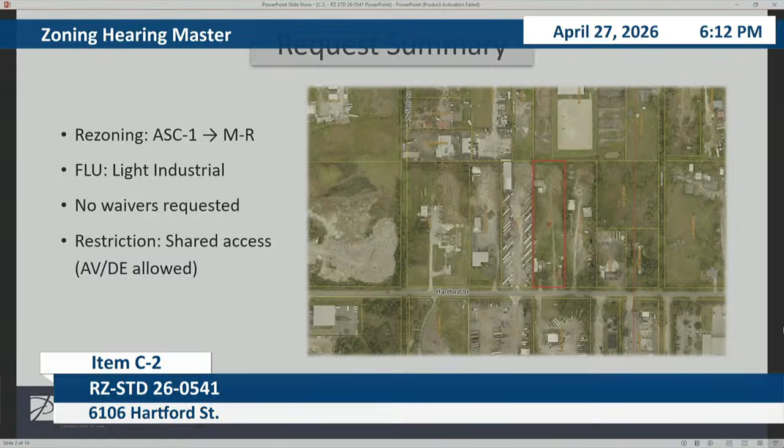All right, good evening. Good evening. Ryan Manassi with Johnson Pope, Director of Planning. Again, we're here tonight requesting to rezone the property from ASC1 to manufacturing restricted for the property located at 6106 Hartford Street. This is a pretty straightforward standard rezoning to align the zoning with the light industrial future land use. There's no waivers or variations being requested, obviously. The only condition is a transportation-driven shared access restriction with flexibility through an AV or DE if approved at time of permitting.

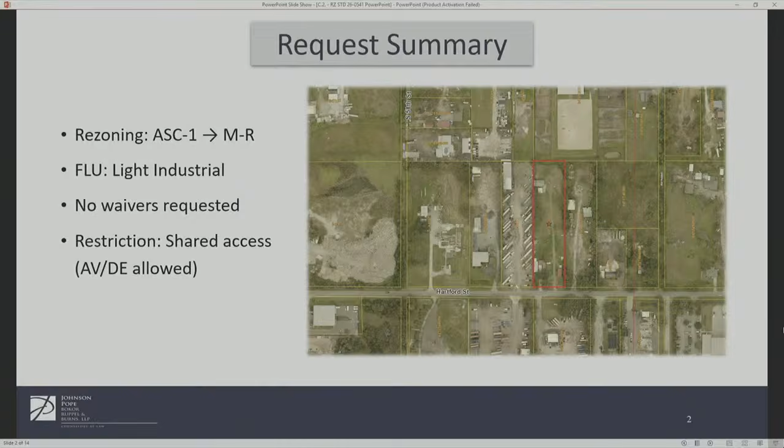The subject property is approximately 2.3 acres, and it's within the urban service area where industrial development is anticipated. It has frontage along Hartford Street, which is a county collector roadway. Currently, the site is limited to very low density residential. Under the proposed MR zoning, it can achieve an industrial type use development, which is consistent with the LI designation.

The subject property carries a light industrial future land use category, which is specifically intended to accommodate manufacturing, warehousing, storage, and other employment-generating uses. There are no incidental uses; they are the core and intent of the LI category. Specifically, under FLU Objective 2.2 and Policy 2.2.1, the future land use map establishes both the range of permitted uses and intensity framework for each category. The requested MR zoning falls squarely within that framework, allowing the site to develop consistent with the character and intent of the LI designation.

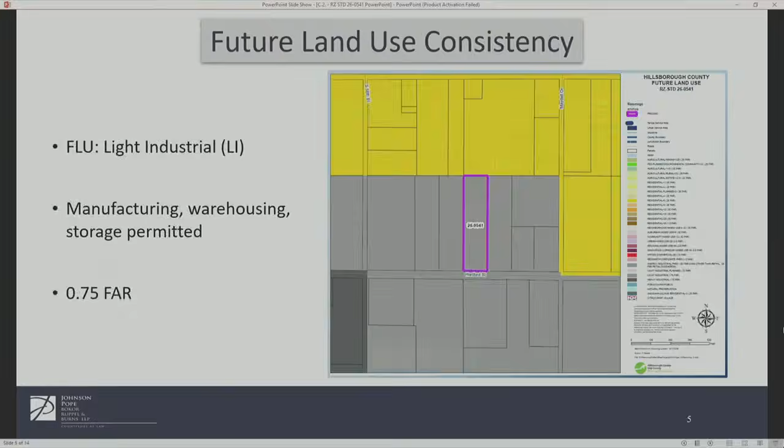This ensures that the development remains within the adopted comprehensive plan limits. And I know your staff is going to present, but Planning Commission found the request consistent, as well as Development Services found it approvable, subject to the transportation-related access condition or restriction.

Regarding the surrounding area, when evaluating compatibility, it's critical to look at the actual development pattern on the ground, not just the zoning labels. In this case, the surrounding area is predominantly characterized by industrial, commercial, and open storage uses, including truck parking and similar operations immediately adjacent to the site.

This establishes a clear and prevailing industrial corridor along Hartford Street. While there is residential to the north, the condition is typical of transitional edges in the county, and the Land Development Code specifically addresses those interfaces through required buffering, screening, and site design controls.

As such, the rezoning does not introduce a new use pattern. It reinforces and continues the established pattern already present in the area.

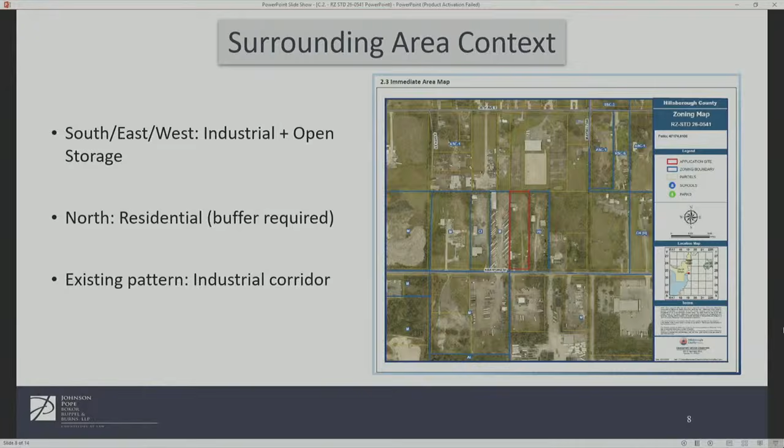Now, regarding compatibility, it is one of the central considerations in any rezoning, and the comprehensive plan provides very clear direction on how it's to be evaluated.

Under FLU Objective 3.1 and Policy 3.1.3, compatibility is not defined as same as; it's defined as the ability of different uses to coexist in a manner that maintains the character of the surrounding area.

Here, the character of the surrounding area is already industrial in nature, with manufacturing, open storage, and commercial uses located to the south, east, and west.

The proposed rezoning simply extends the established pattern onto a property that is currently underutilized relative to its future land use designation. Policy 3.1.2 further emphasizes the importance of transitions between uses, which are achieved through professional site planning, buffering, and screening, not through preventing appropriate uses altogether.

That is exactly what will occur here.

The Land Development Code will require buffering and screening along the northern property line to ensure a proper transition to the existing horse arena. Finally, FLU Objective 4.4 and Policy 4.4.1 reinforce that new development should be integrated with surrounding uses through complementary land uses and mitigation of impacts.

Given that the proposed uses are already present in the immediate vicinity and that all the applicable buffering and site design standards will be met, this request meets and exceeds the comprehensive plan's compatibility requirements.

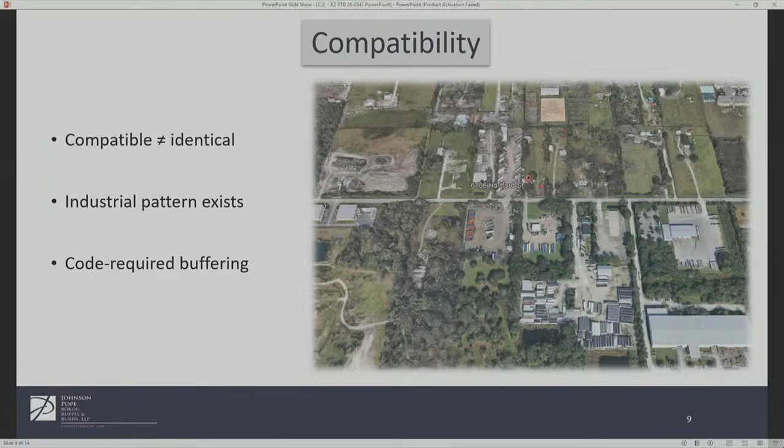Now back to the transportation restriction. Due to the limited frontage and spacing requirements, transportation requires shared access. Importantly, the condition allows flexibility through administrative variance or design exception, ensuring that a workable solution at permitting can be made.

Code compliance: this is not a negotiated PD. Again, there are no waivers. The project will be required to meet all land development codes and site design at permitting.

Economic development: in addition to the land use consistency and compatibility, this request directly advances the county's economic development objectives. Under FLU Objective 7.1, the county is directed to promote target industries and support employment-generating uses that enhance economic competitiveness.

Industrial land is a finite and increasingly limited resource in Hillsborough County. This rezoning preserves and activates land designated for industrial use, ensuring it can be utilized for job-producing activities rather than remaining constrained by an outdated zoning district.

The proposal also supports jobs and housing balance by placing employment opportunities in proximity to existing residential areas, which is a key component of the comprehensive plan's long-term growth strategy.

Now, in conclusion, this request is not asking for an exception to the comprehensive plan or land development codes. It's implementing it. The rezoning aligns directly with the light industrial future land use designation, is consistent with all applicable goals, objectives, and policies, and maintains compatibility through established code requirements, and is supported by both the Planning Commission and Development Services staff.

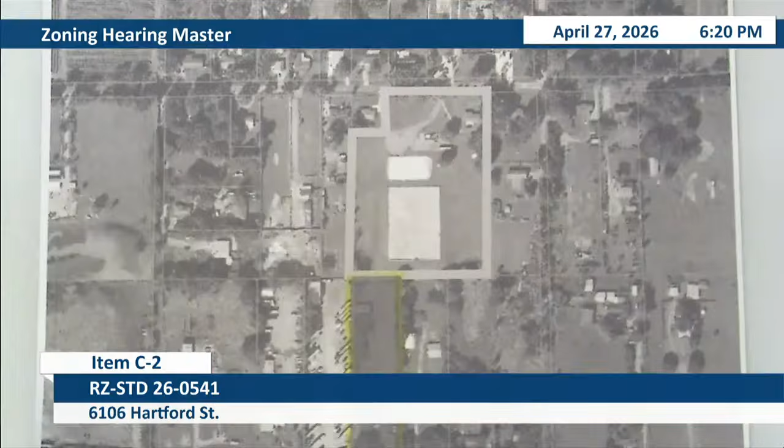Yes. My name is Susan Swift, AICP, Swift and Golden LLC, 3621 South Hesperides Street, Tampa. And I'm here representing Levi Equine Holdings LLC, who own the property to the north.

The subject property is highlighted. I'll start with our ask, since I typically overstate my 3 minutes. We oppose the manufacturing rezoning district, the M or M-R. Our ask is we prefer a CI rezoning or a PD and a 50-foot type C buffer.

We have reached out to the applicant, to their representatives. They were not inclined to change their request for either of these things. So I'll give you my reasons, our reasons. Our clients have nearly 7 acres with horses, stables, and a manager's residence.

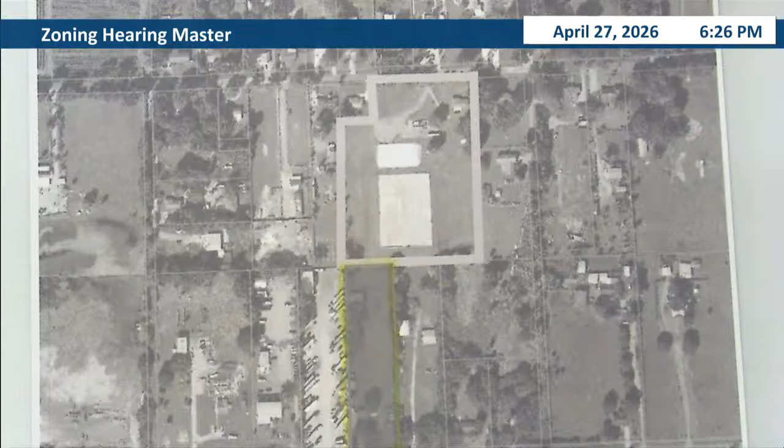Thank you. Let me ask you, Ms. Swift - don't leave yet, let me ask you a couple questions. So if you could put your aerial back up that you started with, the black and white aerial that showed the subject property and your client's property, I believe, to the north.

Approximately, what is the date of this aerial? It's a couple of years old. Okay, so these photos are current, are very recent photographs of the site? Yes.

Understood. The future land use map - we can have the Planning Commission put that back up, or Development Services, either one. It's a significant amount of light industrial, the plan category, to the south of your client. And then according to the staff report, the zoning to the west of the subject property is already M, right? And to the east is a PD, which staff has labeled as being used for open storage. How long has your client been there?

I believe since 2017, but I'm not exactly sure. And I do have a follow-up on the PD. Sure. The PD has a number from '89, so that predates your client, according to that use of the property. And further south of this subject property is already zoned M. So I'm not sure what you're trying to get to by asking them to go to CI.

Well, there is a CI - I believe one of these lots is CI, and I would ask you to look at the wording of the PD, because it did have a condition that looked like it would no longer take effect, but it looked like that was more about the open space on the site, not the use of the property. So again, that was my interpretation, but I think it's important to actually read the conditions of that PD.

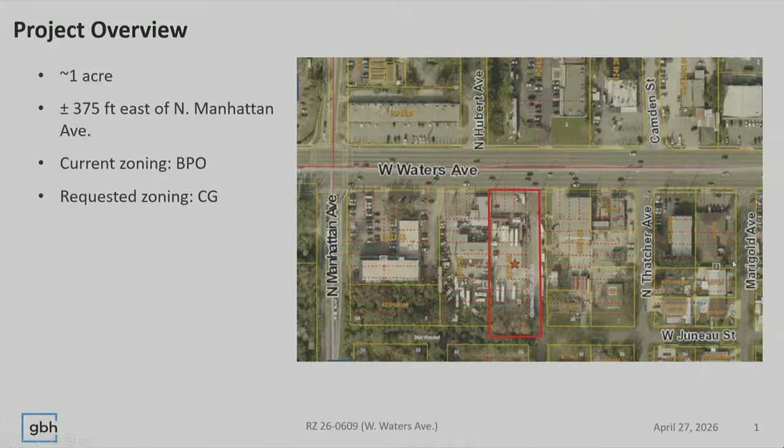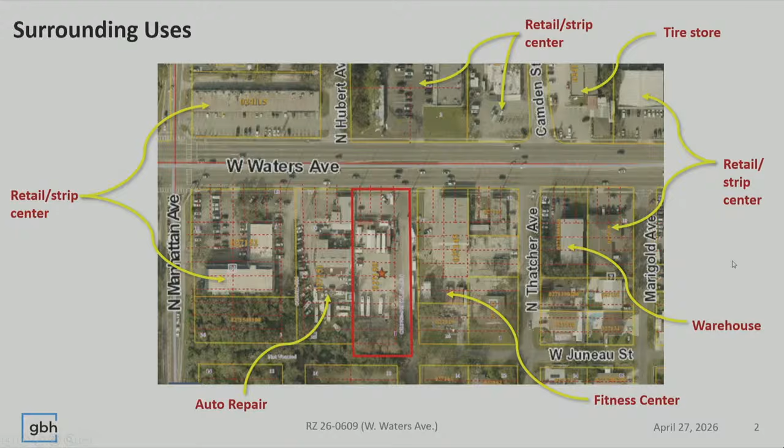Good evening, Alex Shaler, 400 North Ashley Drive with the law firm of Gardner Brewer Hudson. I just have a very brief presentation this evening. The subject property is located just east of the Waters Avenue and Manhattan intersection, and it's just over an acre in size. Currently it's zoned BPO. We are proposing a rezoning to CG to broaden that menu of commercial uses allowed on the site. As you can see in the surrounding vicinity, there's a variety of commercial uses here, a couple different retail strip centers, a tire store, a warehouse, a fitness center, an auto repair establishment, and in fact all of the uses surrounding the subject property as it exists today are commercial uses. So that precedent is already there along this portion of the Waters Avenue corridor.

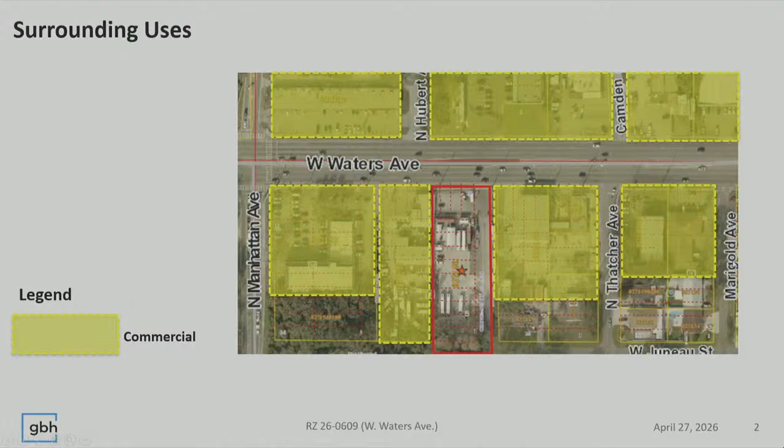Planning Commission and Development Services both found the application consistent and approvable, and we didn't receive any objections from any other departments. So that's all I have, but I'm happy to answer any questions.

No questions at this time, but thank you so much. Development Services.

Good evening. Logan McCaig, Development Services. Application 260609. The applicant is requesting to rezone the property from BPO to CG. The property in question exists along West Waters Avenue, surrounded to the east and west by other commercial uses in varying intensity.

Staff finds that potential uses that can be exercised under the requested commercial general zoning district does not deviate from the existing character of the immediate area. The site will be developed in accordance with Hillsborough County Land Development Code, addressing any potential conflicts with surrounding residential properties or wetlands to the south.

Staff finds the proposed rezoning approvable and is available for any questions. None at this time. Thank you so much.

Planning Commission. Lily Lenahan, Planning Commission. The subject site is in the Residential 9 and Residential 12 future land use designations. It is in the urban service area and not within the limits of any community plan. The proposed rezoning is from business professional office to commercial general.

The surrounding development pattern reflects a mix of commercial uses of varying intensity. The subject site is situated within an established commercial corridor characterized by a range of intensities. The proposed rezoning is consistent with the surrounding development pattern, and therefore the proposal satisfies the intent of FLU's Objective 4.4 and FLU's Policy 4.4.1, which require new development to be compatible with the surrounding neighborhood.

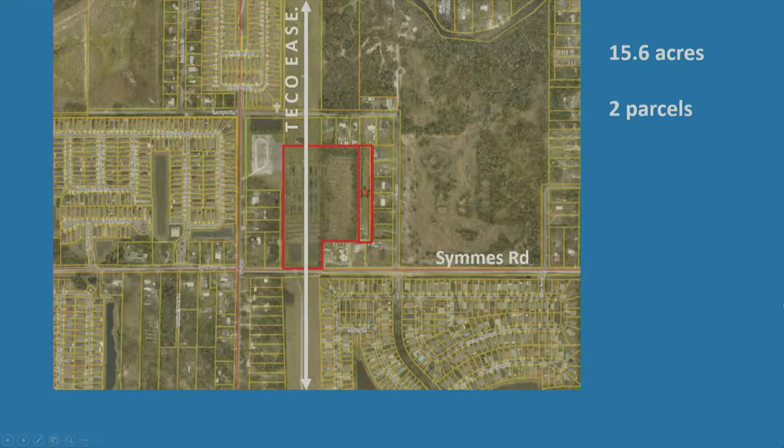Located on Symmes Road at a significant TECO easement, as you can see running on the mapping here. Composed of 2 parcels. You can see the TECO easement and Symmes Road. The current approved PD is 36 single-family homes.

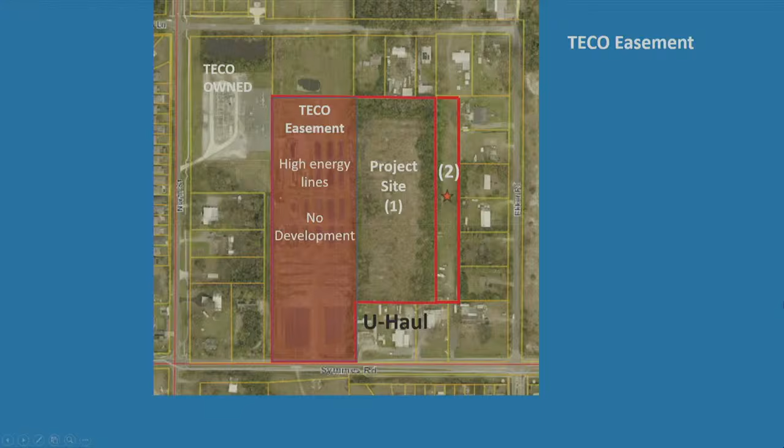One element that stands out is the TECO easement, which contains the large areas you can see here. The project site is in the 2 parcels, 1 and 2, shown here. There'll be no development in the TECO easement. Towards the front on Symmes Road is a U-Haul facility.

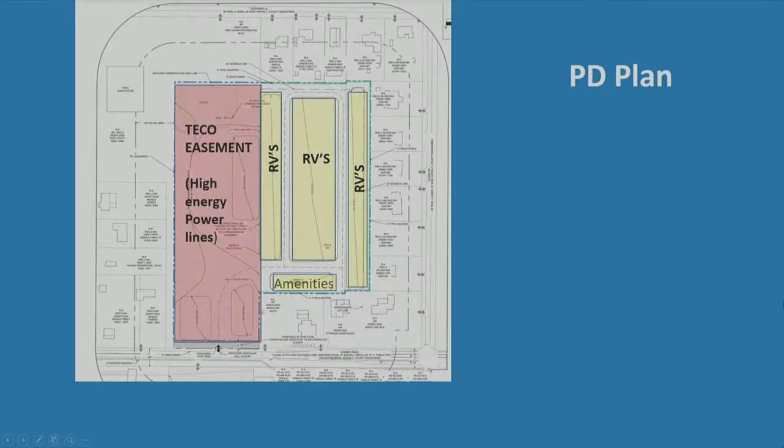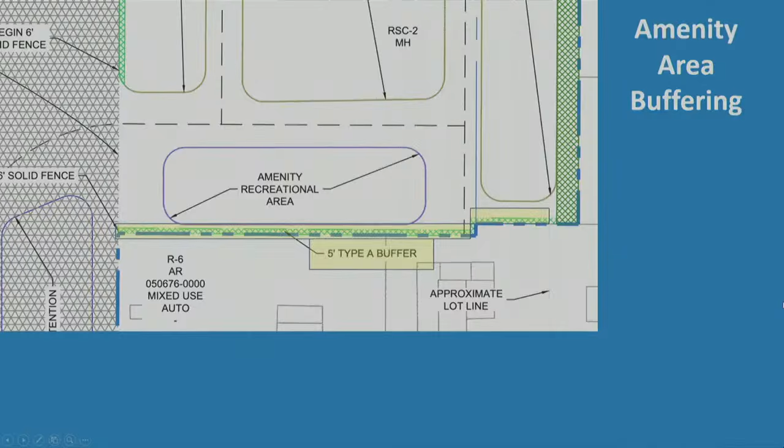25-foot, 5-foot type A setback along with a 6-foot fence. Amenity area buffering would include a 5-foot type A buffer as well. The county transportation report notes a reduction of trips of 508 trips per day, a 28 trip reduction in the AM and 33 trip reduction in the PM with this project.

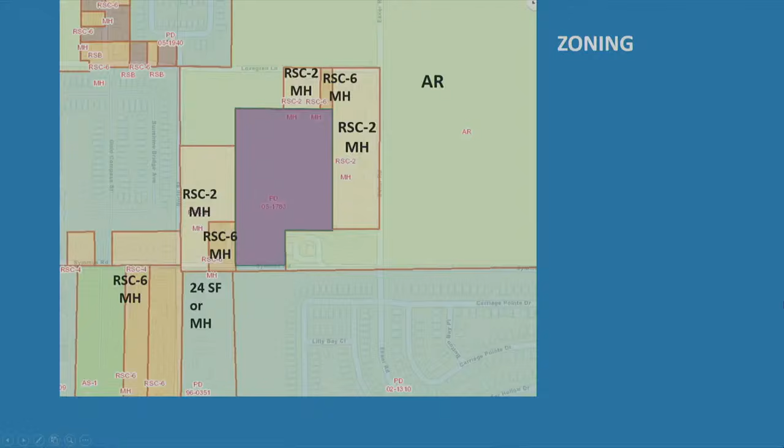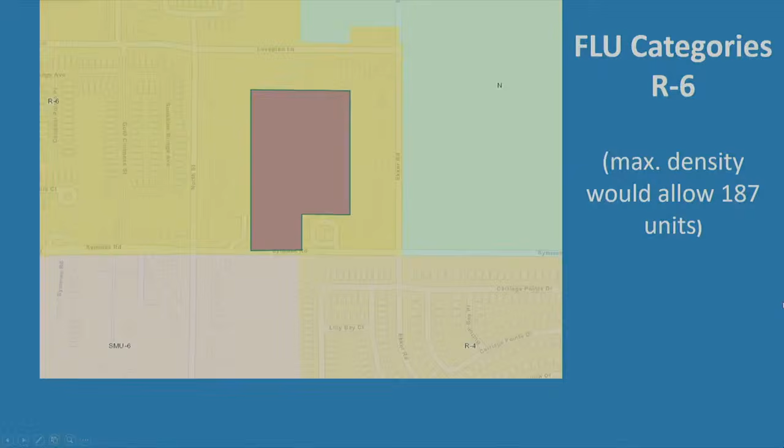The zoning is mostly residential surrounding, RSC2, RSC6, and AR, PD to the south. Future land use category is R6, which would allow a maximum density of 187 units. To the north, vacant and single family. To the south, commercial, TECO easement, and single family. To the east is single family, and to the west is TECO.

Planning Commission notes the area is predominantly characterized by single family, transitioning to commercial uses on the south. The RV resort is residential in nature and shares similar characteristics with surrounding mobile home uses, and is compatible and complementary. The site at 15.6 acres would typically allow up to 93 dwelling units; the proposed 74 RV spaces remain well below maximum potential.

They note it is consistent and would improve the neighborhood, introducing a broader range of housing, which is a major direction of the comprehensive plan. DSD notes that it is consistent with the existing zoning development plan in the area, similar in scale and intensity to surrounding single-story residential and low-intensity uses. RV units, being single-story in nature, are consistent with the height and scale of nearby homes.

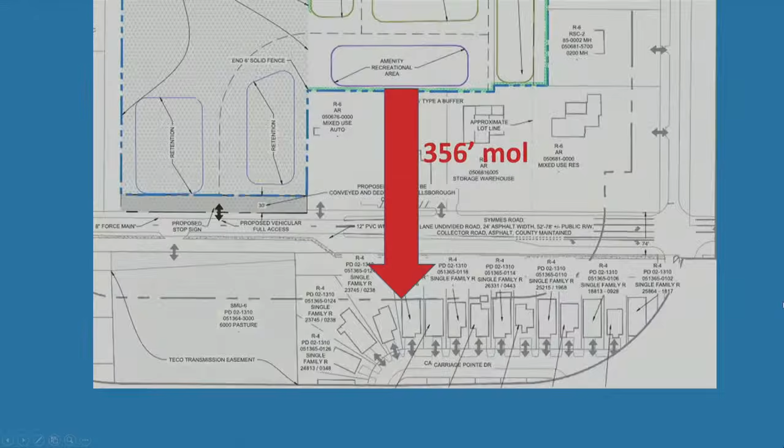We did notice 39 persons several times, so we had a total of 156 notices, including 2 HOAs. We did hold a community meeting out at the community where we had a fair amount of residents come by, which was quite a few months ago. So with that, we're happy to answer any questions or concerns you might have.

I just want to verify for the record that access point through the TECO easement appears to be your only opportunity for access based on the property configuration. I just want to make sure on the record that that is permissible.

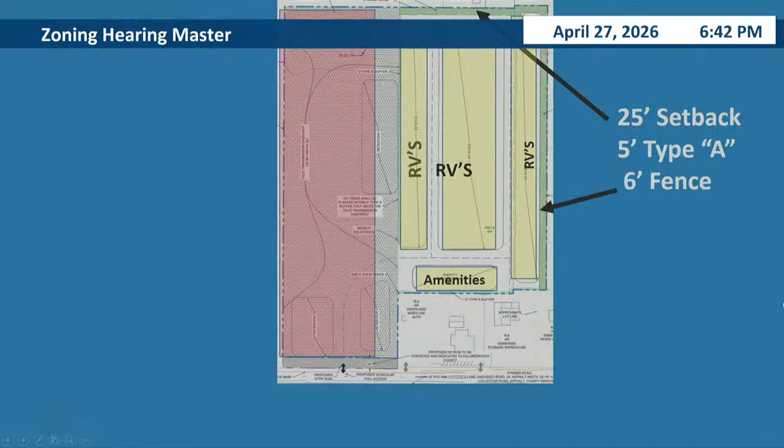Good evening, Hearing Officer Finch, Jeremy Couch with Tampa Civil, 17937 Hunting Bow Circle. Yes, ma'am, that is our only access, through the easement. And that is permissible?

Yes, through the terms of the easement of the subdivision that was previously fully entitled and permitted for construction. We did have full approval from TECO for that access. After the zoning, when we redesign for the RV park, we'll go back and update that access with the new design.

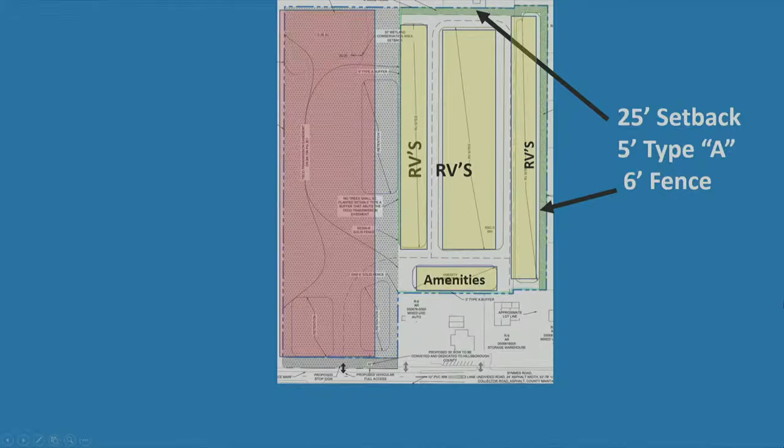All right, thank you so much. I appreciate your testimony. All right, then with that, we will go to Development Services.

Good evening. Chris Gralinar, planner with Development Services, here to present PD 25-1061, a request to rezone approximately 15.6 acres along Symmes Road from the existing PD and RSC2 districts to a new planned development allowing a 74-space RV resort with associated amenities. The site is currently approved for 36 single-family lots. The applicant is requesting rezoning to change the existing entitlements and replace the current residential approval with a 74-space RV resort use.

The existing on-site wetland area is shown to remain undisturbed as part of the submitted plan. The surrounding area includes single-family residential zoning to the north and east, TECO easement to the west, and a combination of commercial and residential uses to the south along Symmes Road. The plan includes 25-foot building setbacks along the north and east boundaries, along with a 5-foot type A buffer. A TECO easement along the west property line provides additional separation. No impacts are proposed on the on-site wetlands.

Staff has determined the rezoning request to be compatible and found it approvable, subject to the conditions in the staff report. That concludes my report. I'm glad to answer any questions you might have. None at this time. Thank you so much. Planning Commission.

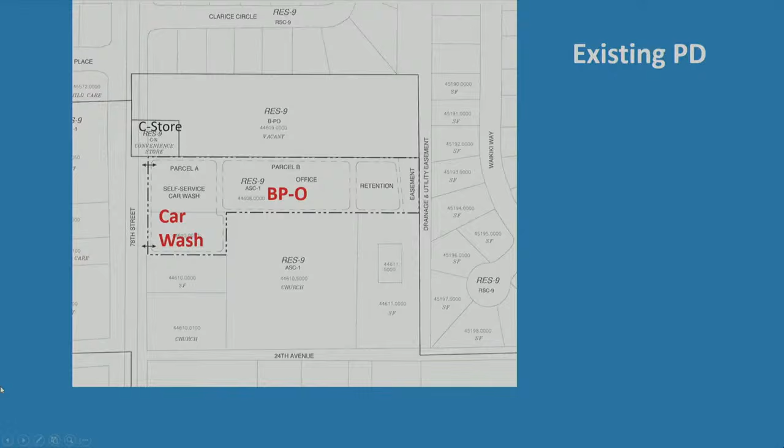So the current entitlement of 000533 is a car wash with 4 bays and ancillary as CN and BPO at 2 stories. So existing PD has the BPO laid out and a car wash to the south, which critically abuts a residential use. And that's why I highlighted, I think one of the most important things of the zoning is that we are removing that car wash use, which would be abutting the residential units.

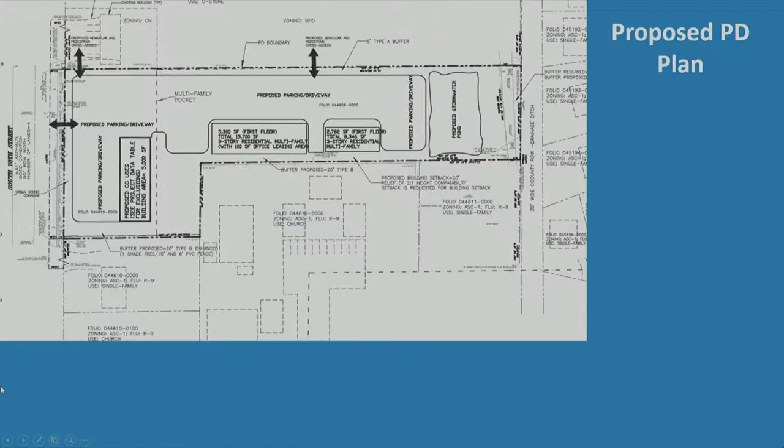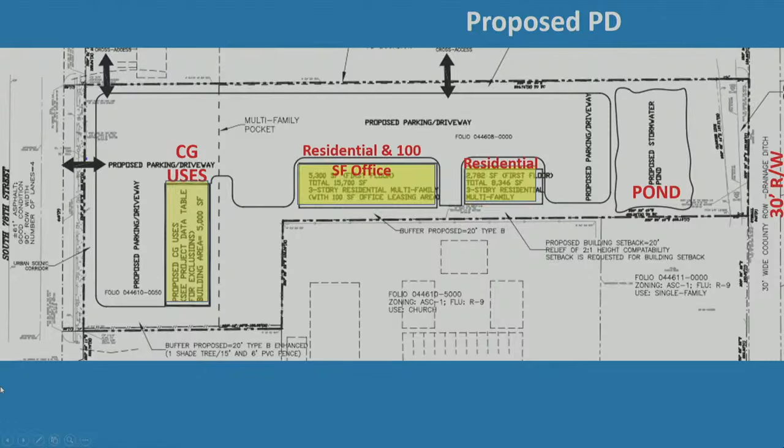And this is just to show you the positioning between the two. You can see it's quite impacting to the residential on the south. The proposed PD plan is laid out here and highlighted. CG uses to the front, residential and office space in the middle, and residential to the rear, and a pond in the far rear. Abutting to the rear is a 30-foot right-of-way.

Under the county transportation report, it shows a reduction of 103 trips on the 24-hour and reduction of 21, or an increase of 21 in the AM and a reduction of 5 on the PM. The request does ask relief of the additional setback of 2 foot for every 1 foot over 20 feet to allow proposed 40-foot multifamily building height.

Single family to the southwest is not impacted. Additional setback is compatible with the church uses. They are rear uses of the church, ancillary for property cleaning and storage, compatible with the single family. Both the Planning Commission and the DSD support the request for relief.

Also to reduce the 20-foot wide type B buffer along the northern property line to a 5-foot buffer. BPO is located to the north and is a less active parking area and is a vacant forested area currently. Additionally, the area to the northwest adjacent to commercial pocket does not require a buffer. And second, not provide an internal 20-foot wide buffer with B-type screening between the commercial use and the multifamily. That would be an internal buffer between the owner himself.

There's probably 60 feet between the proposed uses. This is the existing car wash use, and this is some of the remaining elements that'll be cleaned up. This is the abutting C-store to the north.

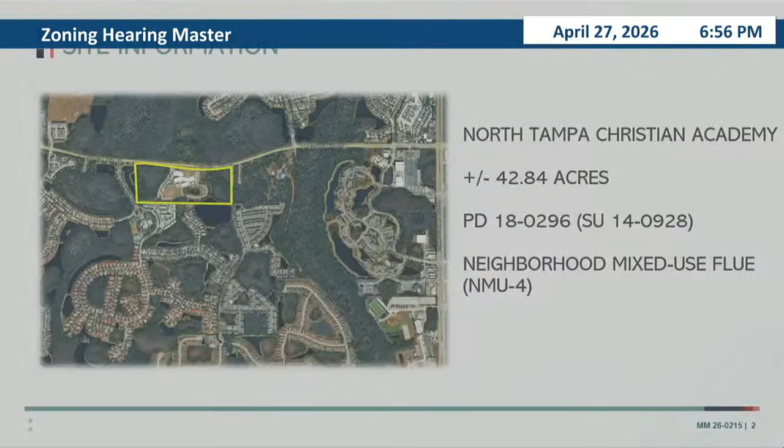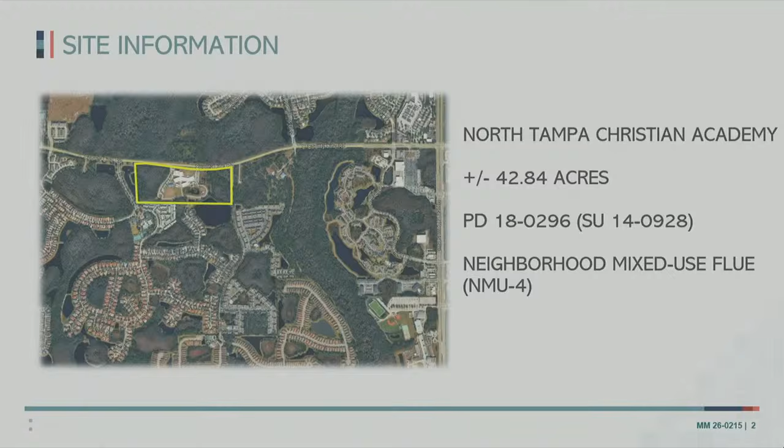Good evening. Thank you. Isabel Albert with HAP, 1000 North Ashley Drive. This is a major modification to an existing school site. This was originally approved in 2014 when they applied for a special use, and then in 2018 they rezoned it to a planned development, and we are today expanding the school.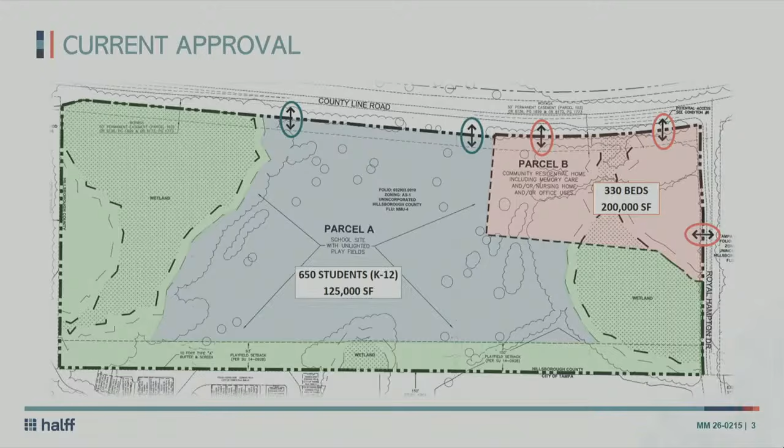Basically, what was approved, they had two sites. Parcel A was for 650 students, and Parcel B was for an ALF for approximately 330 beds, with overall 5 accesses currently approved. Now we're going through the rezoning, and the request is to replace the ALF with the expansion of the school. We're eliminating some of those accesses. So basically, the request is simply the expansion of the school. That concludes it.

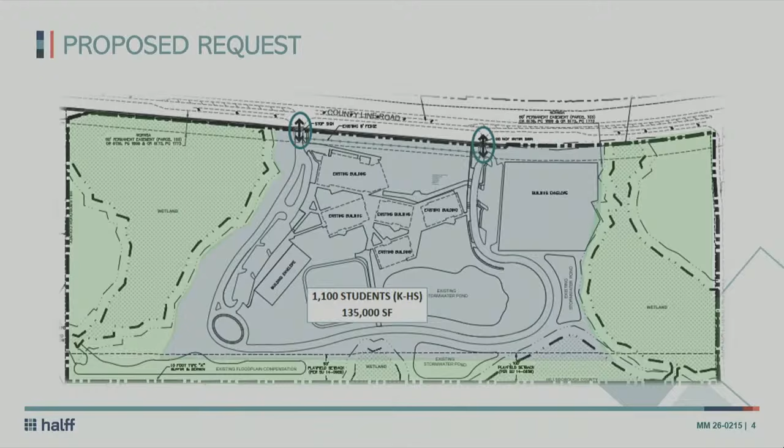We also worked with staff on the queuing, and they recommended approval. So Development Services recommended approval. Planning Commission staff found it consistent, and there are no objections from reviewing agencies. This concludes my presentation, unless you have any questions.

I do have some questions here. As you know, there are a number of letters in the file in opposition to this, mainly pertaining to the traffic signal request. But my questions are more pointed to county staff or your transportation expert, if that becomes appropriate. Mr. Henry, Steve Henry is here as well. So I don't think I have any questions at this point, but I may in the future.

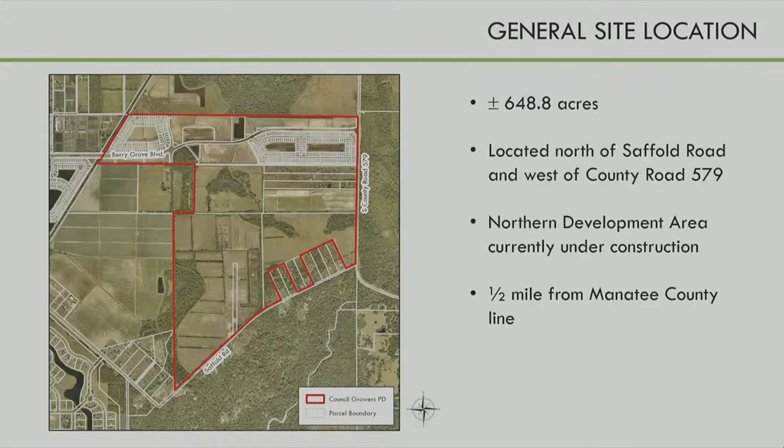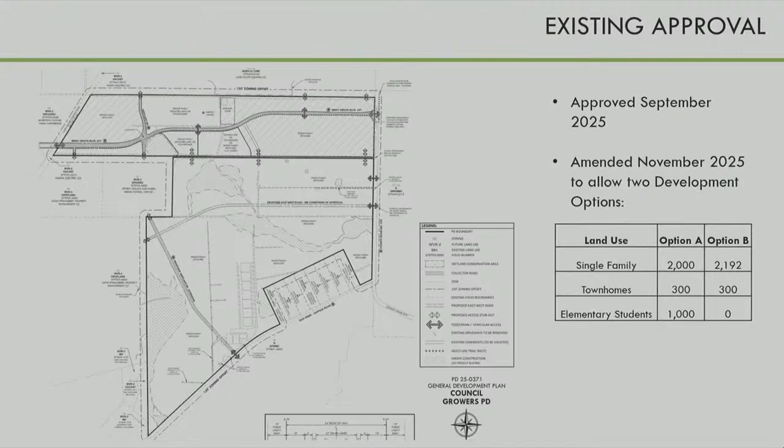Again, this was originally approved in September 2025. We amended again in November, and we're amending now to add property. As you can see on this slide, we're adding 2 parcels that were in what was kind of a notch that was there before, that was always outside of the WVR2, and so it didn't get included in any of our applications. Because it was never WVR2, it didn't get included in the county's application either, so we had to file for a comprehensive plan amendment to change those parcels to Res 4.

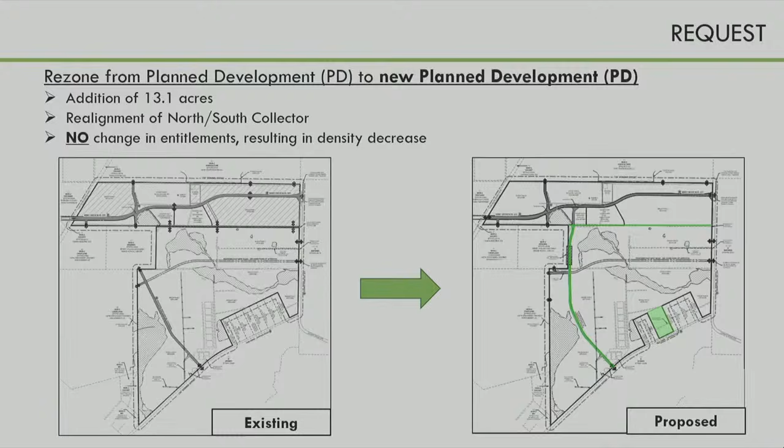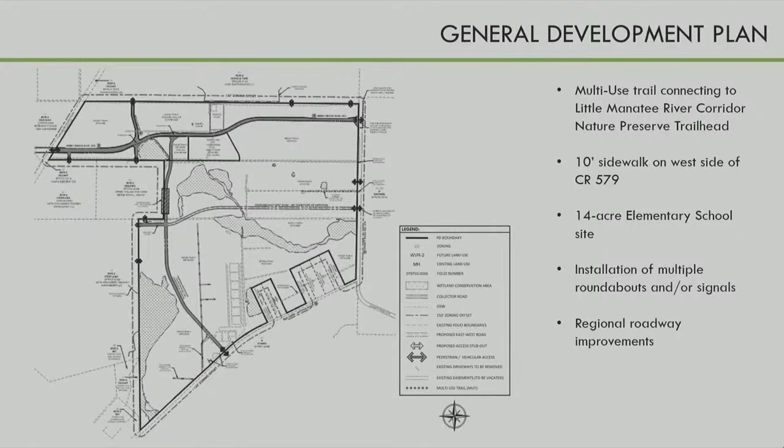We still have the multi-use trail, we still have the 10-foot sidewalk, we still have the 14-acre elementary school, still doing the roundabouts, and still doing the regional improvements.

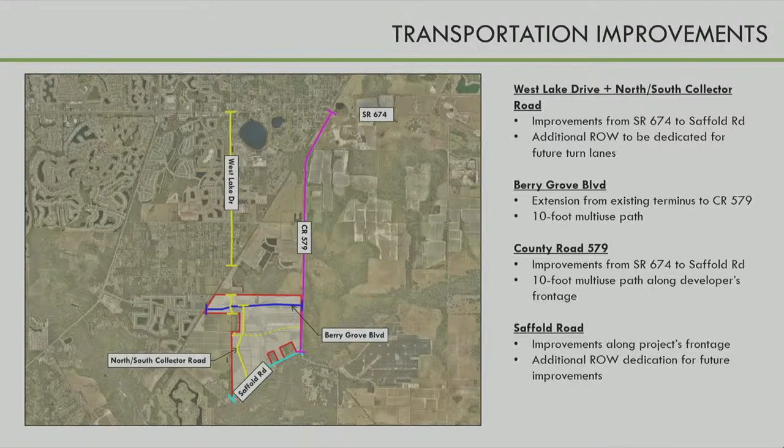This is an exhibit that we show based on the transportation improvements that are required for this particular development. We are revising some of the conditions, and essentially they're all just clarification conditions. They don't materially change what was previously approved. And Steve Henry's here if you have any questions regarding any of those changes and conditions related to transportation.

We have no objections from any reviewing agencies, and everyone has found us consistent and compatible, and I'm here to answer any questions should you have any. No questions at this time. Thank you, appreciate it. Development Services.

Good evening. Jared Fallon with Development Services. This is a request to rezone approximately 648.8 acres from PD and AR to a new PD to add an additional 13.1 acres of land to an existing PD zoning.

The conditions previously approved in PRS 25-1373 will be transferred to this new PD, but with amendments to transportation's conditions. The added area includes 2 residential lots adjacent to the south and a long, narrow strip located in the middle of the site. The addition of land to the PD allows the northern and southern development areas to be joined together, and as a result, the configuration of internal roadways of the site have been modified.

These changes include a new north-south collector road, which directly connects Saffold Road to the Berry Grove Boulevard extension, and a roundabout has been added at this intersection point. Other changes include an additional access connection along the western PD boundary. Additionally, new and revised design exceptions requests have been submitted.

Lastly, given the proposed combination of the northern and southern development areas, the applicant is proposing to modify certain phasing requirements which govern when certain improvements are required to be completed. More information on these changes can be found in the transportation staff report. Staff does not have any compatibility concerns with the proposal and finds the proposal approvable, subject to conditions. Thank you so much, appreciate it. Planning Commission.

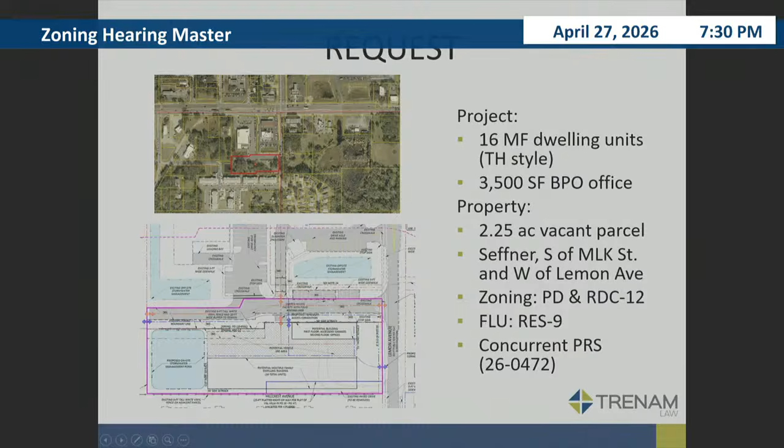Tonight we are requesting a small mixed-use development of 16 multifamily dwelling units and 3,500 square feet of business professional office. The property is a 2¼ acre vacant parcel in Seffner, south of Martin Luther King, west of Lemon Avenue. Combined PD and RDC 12 zoning currently, and in the Res 9 future land use.

We do have a concurrent PRS running with this that will be heard before the board when this goes, and I'll explain about that.

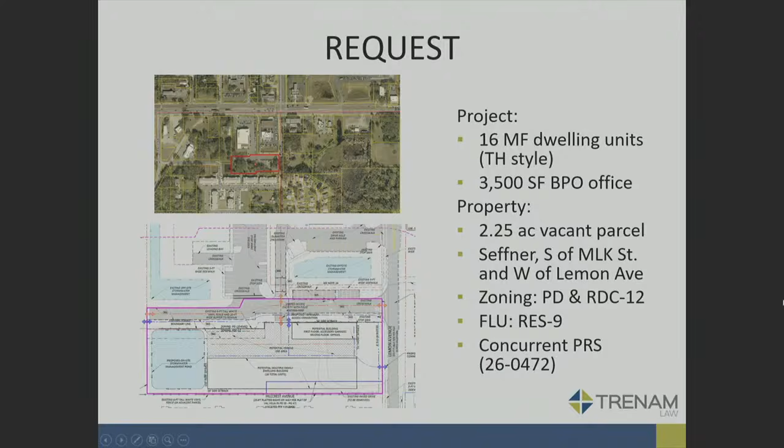So just to give a little background, initially the subject property and the properties to the north were owned by the same owner. The owner sold the parcels to the north for retail development in 2018 and 2021 for a Wawa and an Aldi store. The seller retained the subject property.

For some reason, I don't really know the history, the seller allowed the Aldi developer to use about half an acre portion of the subject property for access, and that piece of property was included in the 2020 zoning that was done for the grocery store.

The access rights, which were memorialized in private cross-access agreements, were also put into the PD. The Aldi developer constructed the roadway between the two properties as part of their development. They didn't actually put any sidewalks on the west side, which is something we're doing now.

But when the seller sold the subject property to my client, we realized the difficulty created by this situation. Although we were going to be required to maintain the access so that everyone could use it, we couldn't count that acreage, which is basically the area in yellow, towards the density and FAR needed for this development, since it was in another PD and you're not allowed to double dip.

So fortunately, the acreage of the yellow area did not affect the Aldi development. They didn't need that for their FAR. So they were agreeable to us moving it out of the PD.

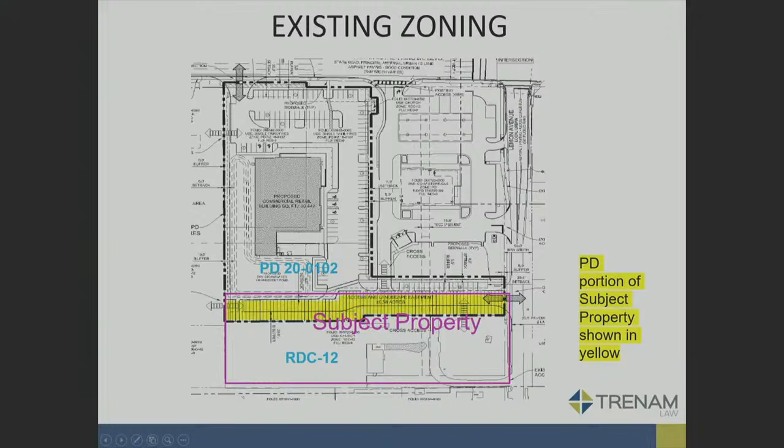So we have a simultaneous PRS running that is going to move the property from that PD to this PD. And this PD now provides conditions to ensure that that access continues, but it allows the two properties to continue to develop on their own in compliance with the code while sharing the benefit of the access and the buffering.

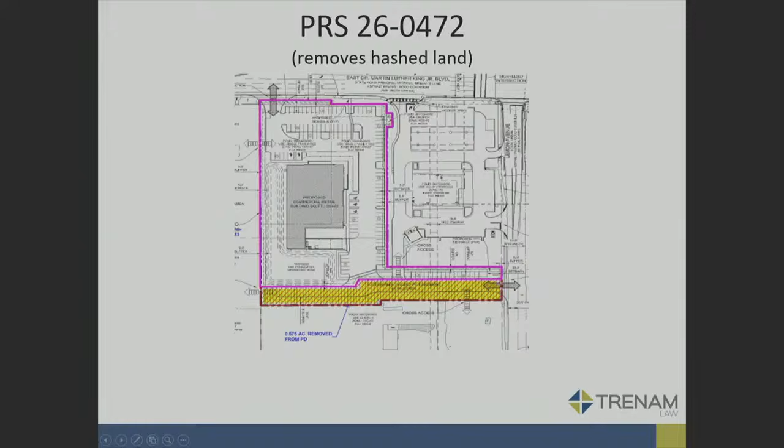This rezoning will then cover that whole area, the part that was the RDC 12 and the part in yellow, which currently is but will hopefully be taken out of the PD to the north. Again, there are multiple existing access easements and other easements between the property.

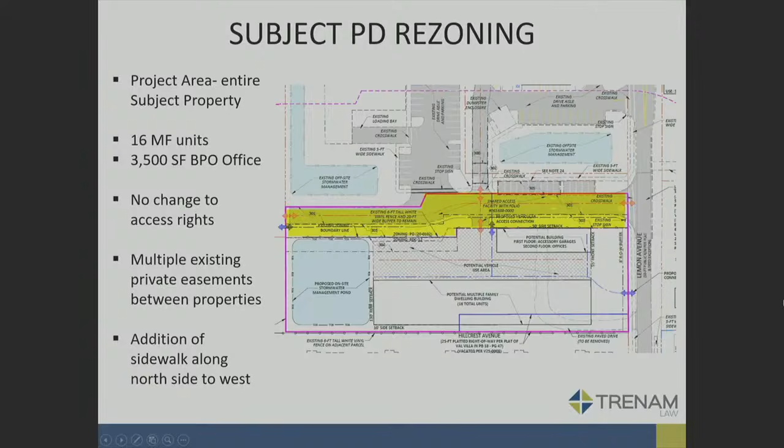This PD will add a sidewalk along the north side of this property to the west. The sidewalk itself is a tricky issue due to the site conditions, so we are requesting a variation to allow a 5-foot sidewalk within that 20-foot northern buffer that was approved as part of the other PD and would be included in this one.

Again, there is no existing pedestrian connectivity to the west, but because of the terrain there, there is no real other option for the sidewalk. If you look at that aerial, you can see the road, and basically on all sides of it are deep depressions, steep slopes for stormwater ponds. And because the road was built where it was, and there's really no extra room other than in that landscape buffer, that's where we need to put it.

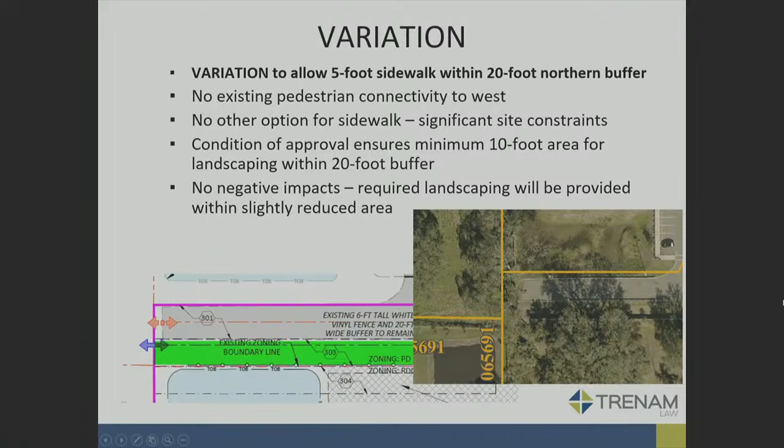Fortunately, no negative impacts. We're going to put the required landscaping in it anyway, and the county has asked for a minimum 10-foot area to ensure that there is sufficient room to put that landscaping in, and that's a condition of the approval, which we're agreeable to.

Compatible with the surrounding area, it really is like a small mixed-use development that meets the infill intent of the comp plan. It's tucked in between a multifamily development to the south and the office and retail to the north. The Planning Commission agrees that it's compatible, and in fact it's one of the best Planning Commission staff reports I think I've ever gotten, so I'm very happy with it.

So to the north is the Aldi and the Wawa, and we have that cross-access. The northwest is an office development zoned BPO. To the south is the apartments.

This will provide a step down in intensity between the apartments and the commercial to the north, because we've put the residential closer to the apartments and the offices closer to the commercial. Lemon Avenue dead ends at our property, so traffic from our development will not continue further towards those apartments or the single family you can see on the southeast side.

There is a single family parcel to the east, but we will be providing buffering to code. No environmentally sensitive areas or wetlands, and we think this really provides a good residential and neighborhood office use that will benefit everybody in the area.

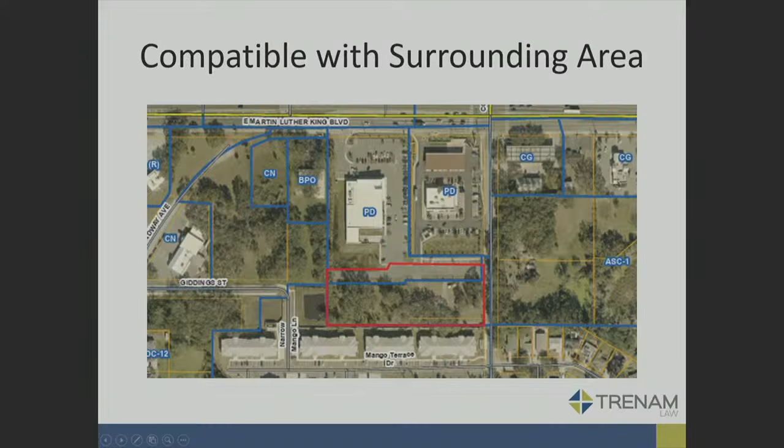It is consistent with the comp plan. As I said, the Planning Commission agrees, it meets commercial locational criteria, meets the Seffner-Mango community plan requirements, neighborhood protection policies, and is ensuring pedestrian connectivity with the sidewalks.

Lastly, transportation really shouldn't see a large trip increase with this development. We have the access via the Lemon Avenue driveway. Cross-access to the north parcels will remain as part of the conditions. The new sidewalk, which I mentioned, and an administrative variance, given that the existing road that we are not changing is too close to the small residential driveway across the street on Lemon, but the county has found it approvable. So with that, we would respectfully request your recommendation.

Thank you. I just have a couple of questions. In reviewing this in anticipation of the hearing, what would seem like a pretty straightforward request is very complicated by this shared access easement and so forth. So I appreciate the background on going through the property to the north. Let me just confirm, let me go through the steps.

Let me confirm the variation. The variation is to put a sidewalk in a buffer, that's what you're asking? That's correct. Okay, and I think what took me a while to figure out was that the buffer isn't labeled on your site plan that I could tell, and so it took me a minute to find the shared access facility, obviously that's there.

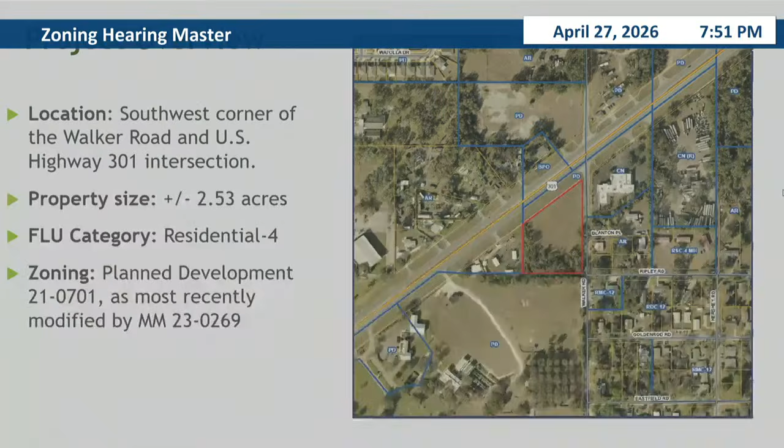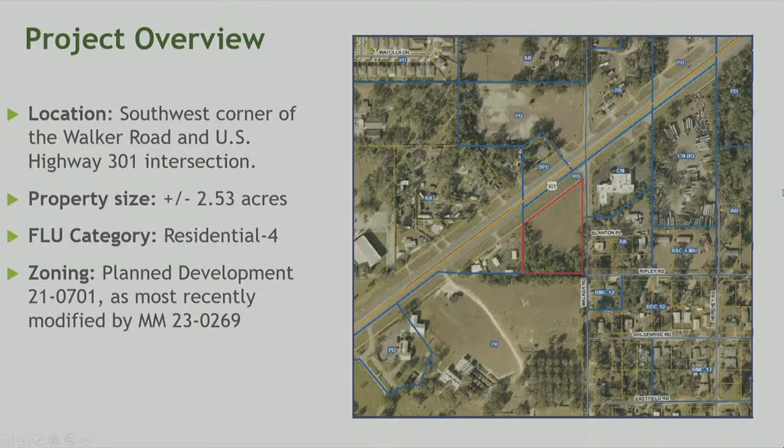Good evening, Justina Gale with Forward Planning and Design, address 514 Howell Street, Dunedin, Florida. The project site is approximately 2.53 acres located on the southwest corner of Walker Road and US Highway 301. The future land use category is residential 4, currently zoned as planned development, with the most recent modification done in 2023. The current approval allowed for 2 options: option 1 was 18,500 square feet for a health practitioner's office, and option 2 was 12,200 square feet for a health practitioner office and 6,300 square feet for a daycare.

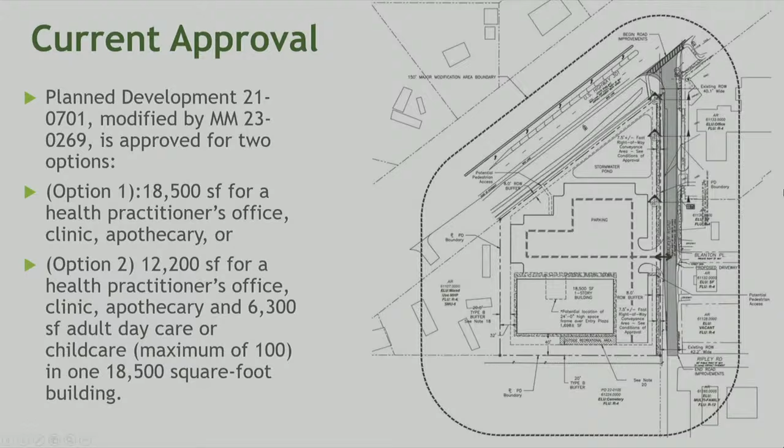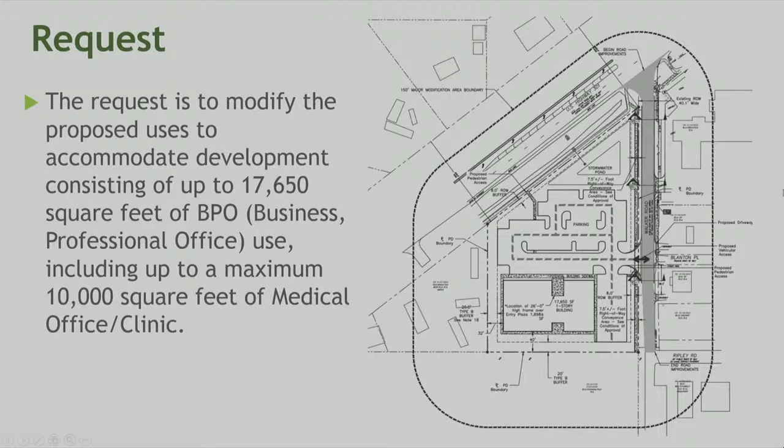The proposed request is to modify the existing PD. The proposed use is to accommodate development consisting of 17,650 square feet of business professional office uses, including up to a maximum of 10,000 square feet of medical office clinic. The proposed modification includes reducing the maximum square footage to 17,650 square feet, and modifying the proposed uses to allow for restricted business professional office and medical office clinic uses. The maximum building height is proposed at 20 feet, with the entry feature having a maximum height of 26 feet.

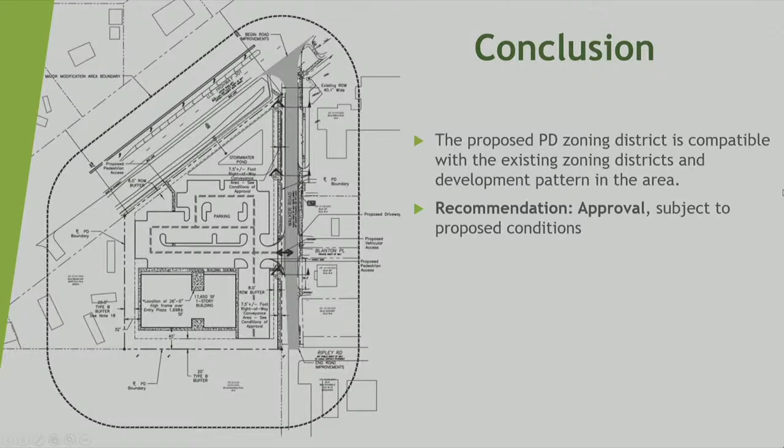The adjacent uses consist of a cemetery, mobile home park, commercial, office, and single-family residential. To the northeast is commercial neighborhood. There's AR located to the east and west, and to the north is business professional office. In conclusion, the proposed PD is compatible with existing zoning districts and the development pattern of the area, and the recommendation is for approval subject to the proposed conditions.

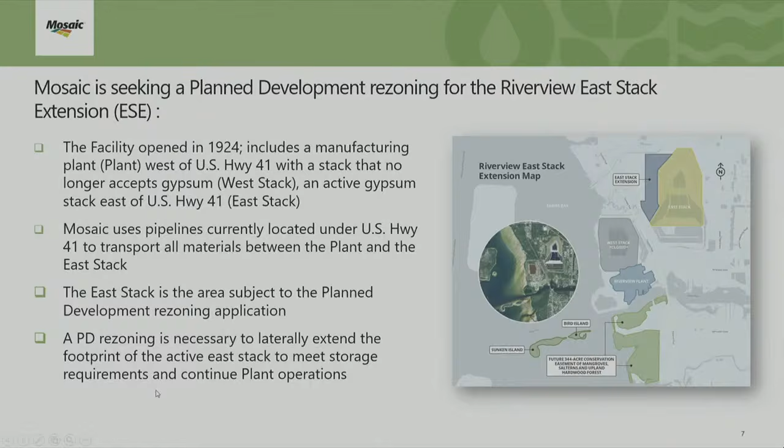We use pipelines under 41 to transport all materials between the plant and the East Stack, and we're not requesting any changes to that existing infrastructure. We are requesting a PD rezoning to laterally extend the East Stack to provide additional storage of gypsum for approximately 16 years to continue our plant operations there.

We are requesting to add approximately 127 acres to the PD boundary for a total PD acreage of just over 1,400 acres. The ESE, the East Stack extension, includes 178.5 acres of new land disturbance onto the existing East Stack. With that, we will be incorporating approximately 160 acres of the existing stack into that project area.

By incorporating that existing stack, it allows us to get the 16 additional years of storage without needing a standalone stack, which would be approximately 350 acres. The area currently is highly developed, and the land is largely converted to industrial, recreational facilities, as well as some racing facilities and auto salvage yards.

The ESE will impact approximately 29.5 acres of low-quality wetlands and streams, and the impacts will be compensated through the purchase of mitigation bank credits, a commonly acceptable form of compensatory mitigation. Details of the E-Stack extension have been directly coordinated with EPC.

We did an extensive review of several off-site locations for this project. We found 7 possible locations, and the analysis included a comparison of wetlands, streams, proximity to plant, as well as location in the landscape, and none of those were able to meet our storage requirements of 16 years.

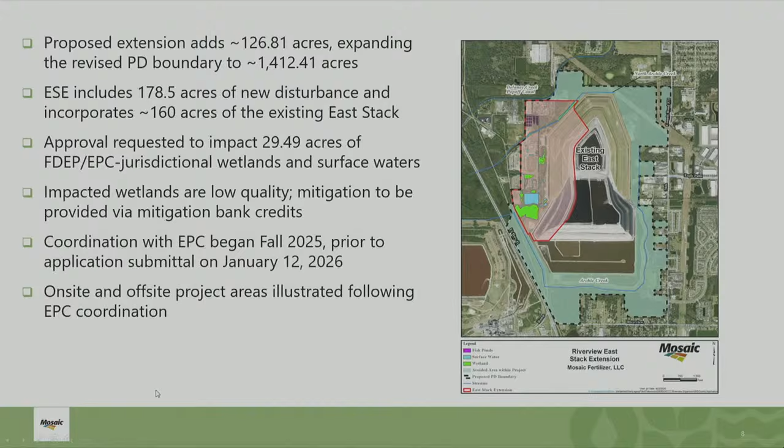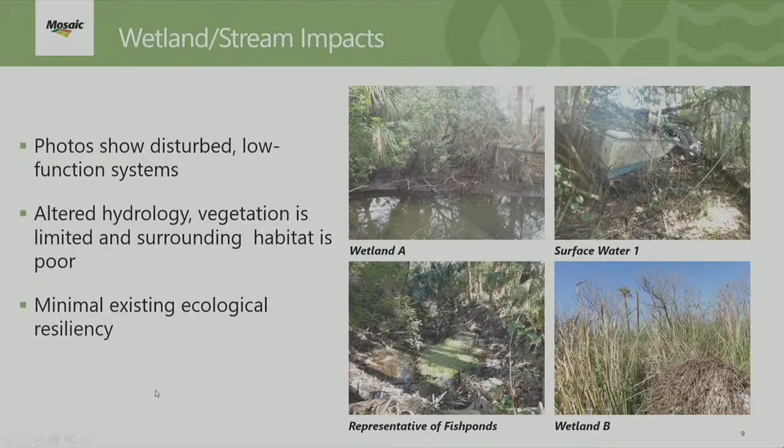These images here represent examples of the typical aquatic systems that are going to be impacted with this project. What you'll notice is that these systems do not resemble natural functioning streams or wetlands. The hydrology has been altered, vegetation is limited, and the connectivity to the surrounding habitat is poor. While these features meet regulatory definitions, there is very little resiliency or functional value remaining in these areas.

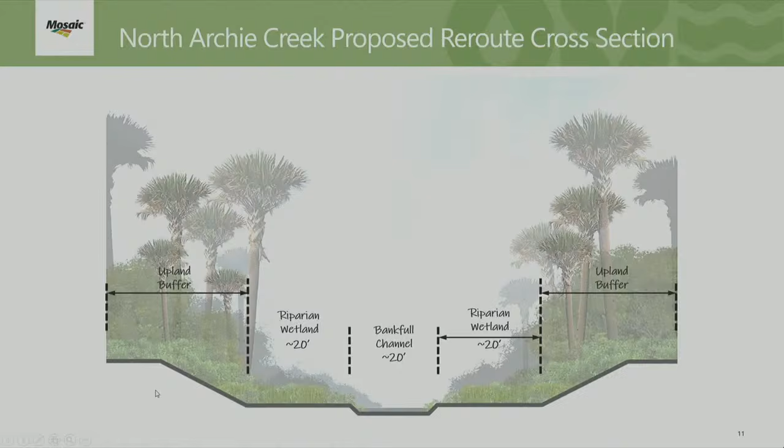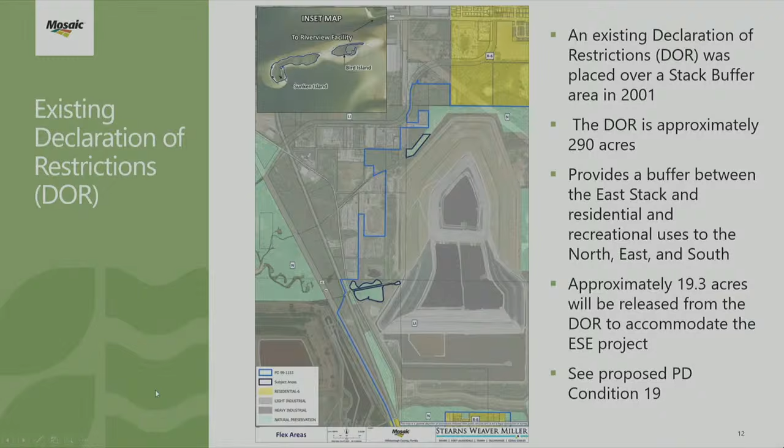So we are also proposing to utilize the flex provision of the light industrial future land use category for approximately 19.3 acres, and therefore amending the stack buffer declaration of restrictions. Those two areas are outlined in black on the west side of the stack within that blue line there. We are proposing to replace those 19.3 acres within the DOR with approximately 347 acres of land owned by Mosaic south of the Alafia River with a conservation easement. And all of this is reflected in PD Condition 19.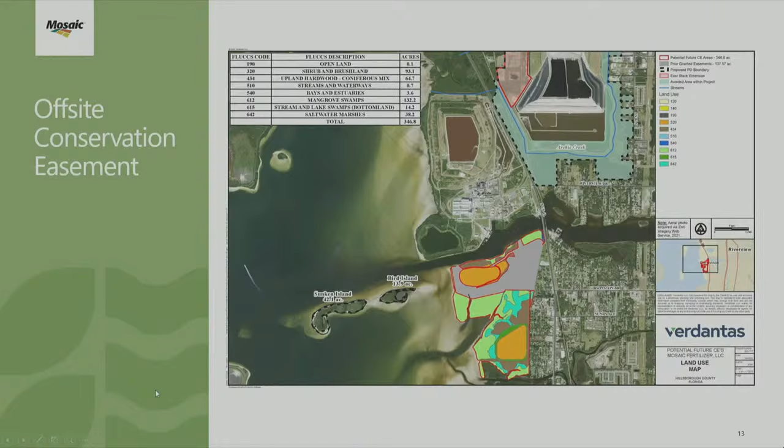This exhibit shows the location of that conservation easement. It was south of our plant site, south of the Alafia River, but it does border the bay, and it's to the east of Sunken and Bird Islands. The conservation easement will permanently protect approximately 347 acres.

It's an opportunity for us to pair conservation easements with upstream mitigation areas. Since the resources being impacted as part of this request are already degraded and limited in ecological function, the mitigation strategy is intentionally robust and multi-layered. We viewed it as a whole, and this approach simply doesn't replace the impacts of the wetlands that were impacted. It results in stronger, more resilient ecological systems that are permanently protected.

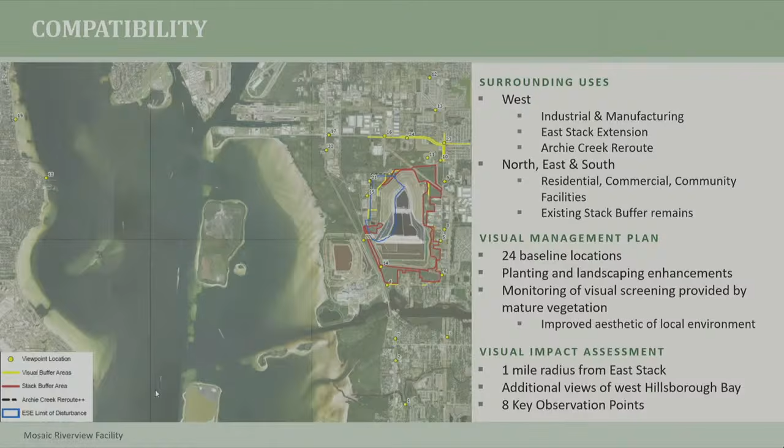And then from the perspective of the north, east, and south, there is an existing stack buffer that will remain in place. The surrounding residential, commercial, and community facilities areas will continue to have the view of that mature landscaping that was planted either 30 or more years ago with the initial condition, or there was enhanced plantings done in 2003. There is a management report that is filed annually regarding the visual perspective from 24 key areas. That management plan for this year and in the future notes that the mature landscaping will effectively screen and improve the visual landscape.

We did have a variation that was filed for the enhanced buffer. Typically in an industrial site, a 30-foot landscape buffer with a wall is required. We are exceeding that dimension. We have asked to eliminate the wall, again due to that mature landscaping, and we have incorporated that buffer into the general site plan, ensuring that that remains in the future.

And then with regard to the East Stack extension, the North Archie Creek reroute will again provide that additional landscaping, enhanced visual management, and an additional 100-foot separation.

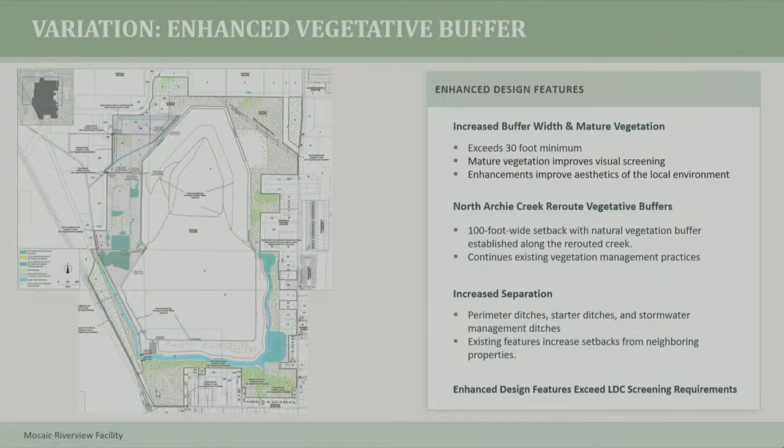So in conclusion, we believe that the plan development, and specifically the East Stack extension, is consistent with the Comprehensive Plan and Land Development Code. The companion amendments and proposed conditions, along with the general site plan, will maintain consistency with the comprehensive plan. The light industrial flex meets the required findings and supports the additional required agency permits. And then the extension occurring along the West Stack boundary proximate to industrial and manufacturing uses is appropriate.

The mature established buffers will continue to provide that visual screening and separation, and the North Archie Creek reroute will support an improved visual landscaping from the existing surrounding uses to the west.

That concludes our presentation in chief. Our team is here should you have any questions.

I do have a few questions, and several of them have been answered by your presentation. I appreciate that. One was, where is the flex? And you illustrated that. And two is, where is the conservation easement south of the Alafia? So you've answered those in your graphics, so thank you.

My question pertains to the variation that references the visual management plan. In my reading, it talked about 18 viewpoints. My question was, is that the original approval, and is that what you're going to maintain? But I just saw in one of your graphics that talks about 24. So was that increased as a part of this request to expand the stack?

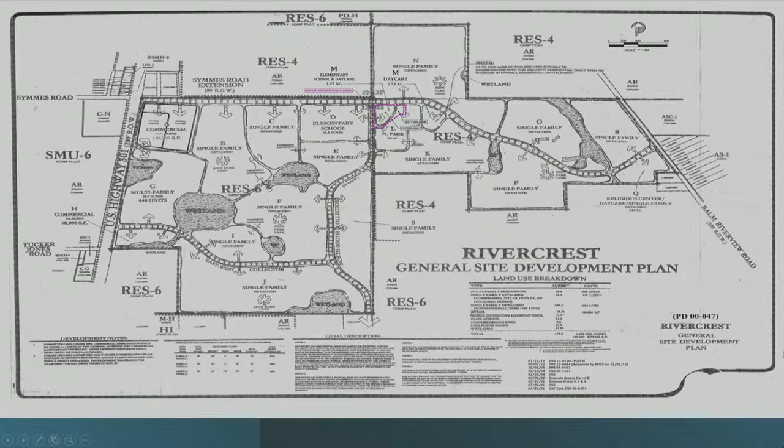It's indicated on the site plan that the school is located on the westernmost portion of M and a little bit of L. You can see the parking area is in pod L. And then on the eastern side, there's also a daycare, and that's unrelated and unaffected by that. So the changes that I've asked Michelle to make are just some geographical changes to indicate where the actual locations are, just to make that a little more accurate. And then on the right, you can see the proposed site plan.

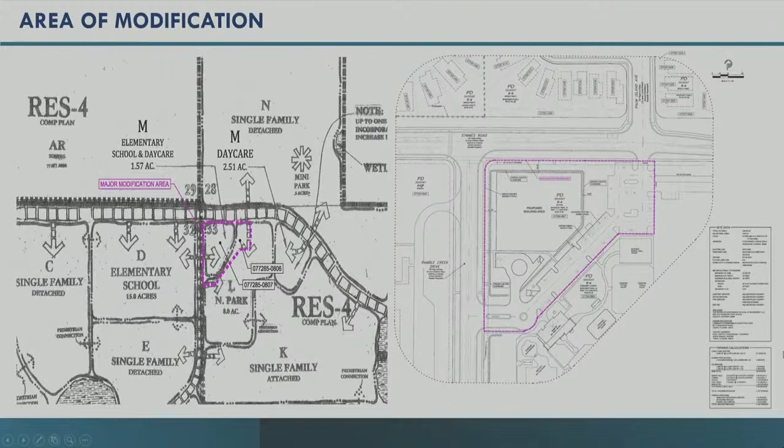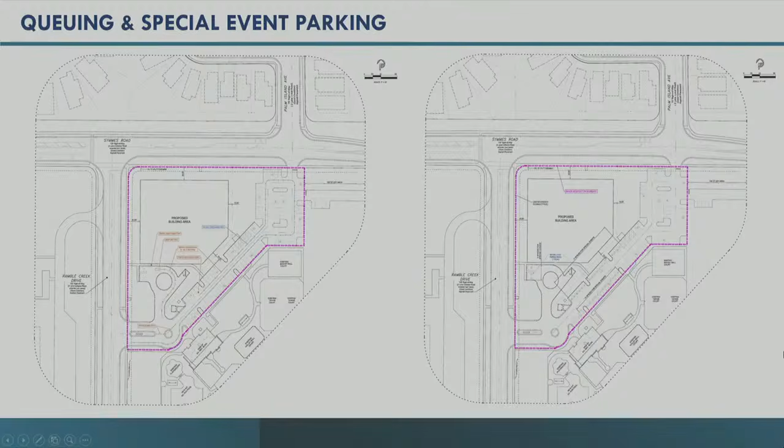And then we have, in the site plan activity, a queuing and special event parking detail as well. Essentially what we're asking for in option 2 is the 80 children at the daycare and the 50 students for the elementary school. And I am here to answer any questions that you might have.

Staff has found this consistent and compatible. Just to verify, I went back and looked at the original PD 00-047, and it looked like you backed into how many students were approved based on a trip count or something like that. Is that correct? Yes, and I'll ask Michael Yates to come up - he did the traffic analysis and came up with the math, and I want to make sure I'm accurate on that.

Essentially, this was approved for a daycare. There's actually construction plans that were approved that said school, so our client didn't realize there was any issue with the rezoning. As soon as he figured out there was an issue, he asked us to come in and make it right. But before you go, it never specified the maximum number of children originally, did it?